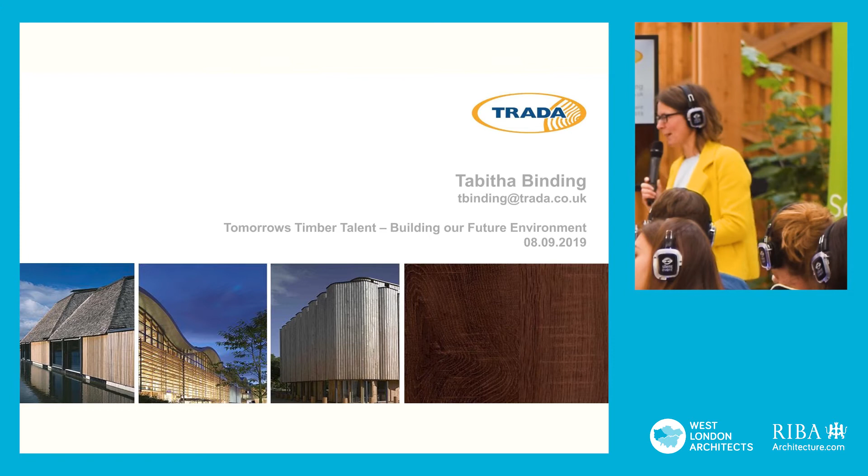So TRADA. I came to work for TRADA in January 2018. My background is in manufacturing, timber supply chains, and whole house timber building, a bit of passive house. And from our previous speaker, a whole house retrofit, 1840s, beautiful cork, limecrete, very low cost of living, very healthy house. I love my house in Wales.

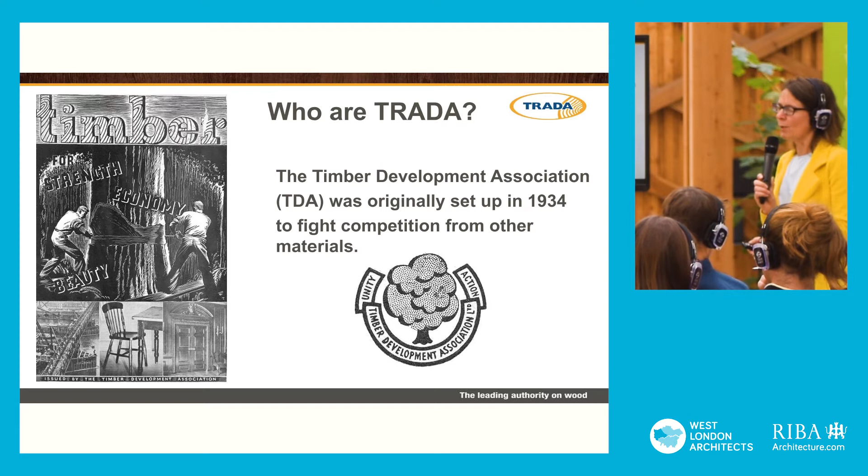So who are TRADA? Started in 1934 as the Timber Development Association, and it was to fight competition from other materials back in 1934. Now, I'd say we've got to work with other materials. All our buildings are multi-material and they are hybrid, and we really, really, really do need to work together.

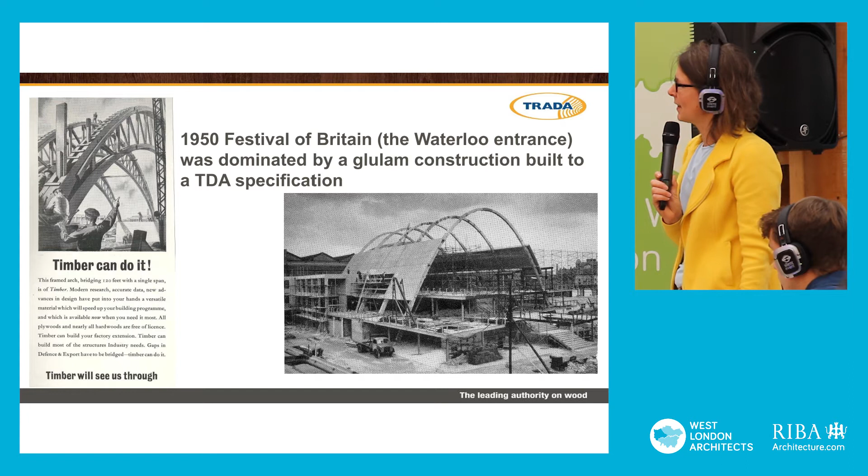So this beautiful building here, nice glulam, 1950s. It's not a new product. That was a Festival of Britain building. Obviously not still there, but we do need buildings to last and look brilliant.

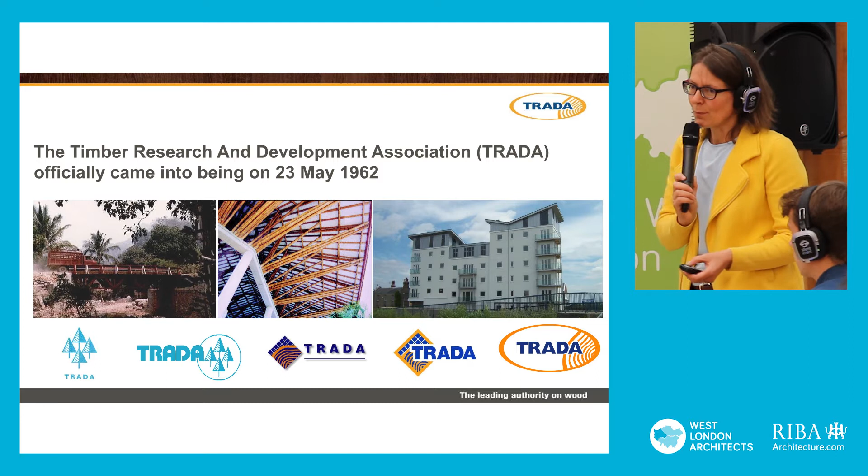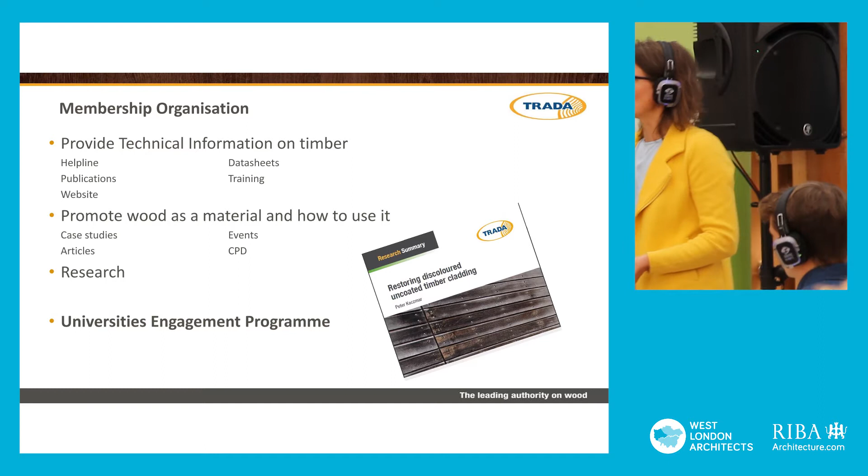The Timber Research and Development Association, as we now know it, came into being in 1962. It is a membership organisation. We provide technical information, we promote wood as a material, and we have a university engagement programme.

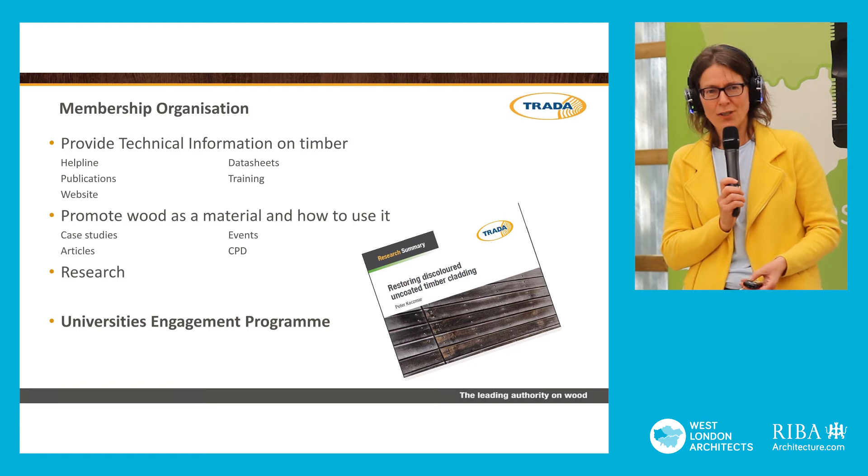Now, when I say it's a membership organisation, we also have an advisory line. So if, as architects, or any kind of practitioner, you have a query about timber, please get in touch. Phone us up and ask us, because we will give you a certain amount of free information. We won't go into details. We do have a paid-for service as well. But we'd much rather you speak to us and get some solid information than go out and learn on the job. So just bear it in mind.

Membership, again, starts about £190. It's not hugely expensive.

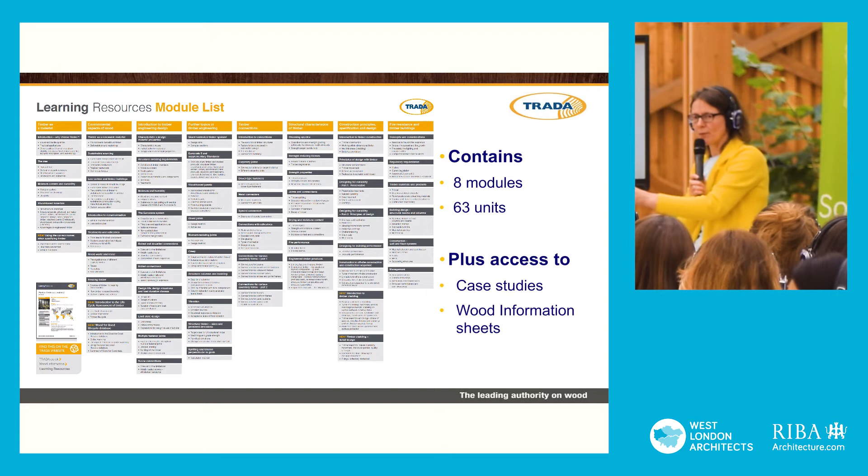So we have, I'll go more into this, learning resources. We have 100 case studies, actually more than 100 case studies, and we had wood information sheets. So our learning resources, which is absolutely free to everybody, as a registered user, you can get hold of this. 8 modules, 63 units, pretty much everything you want to know about timber. Very responsive.

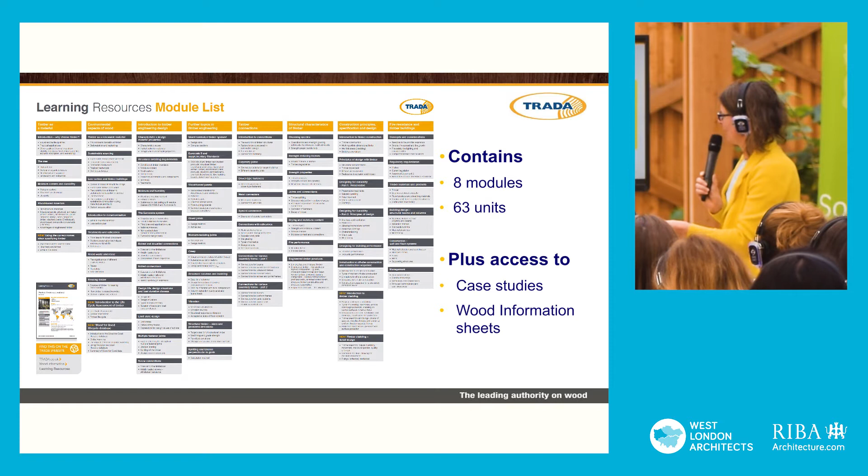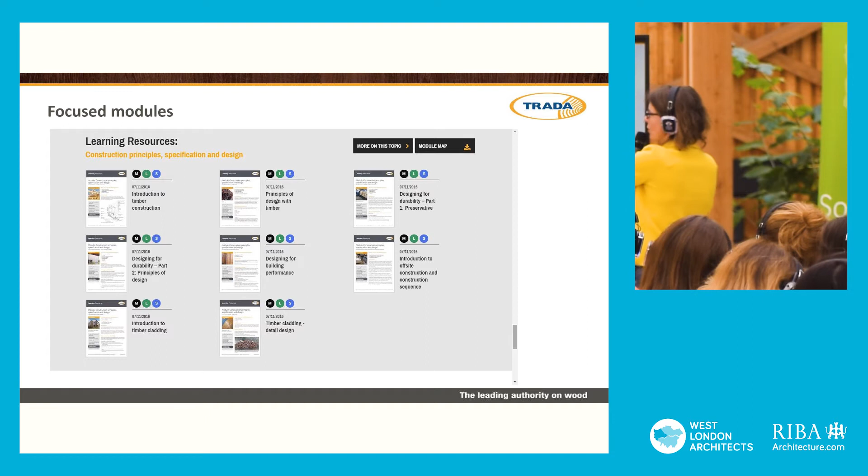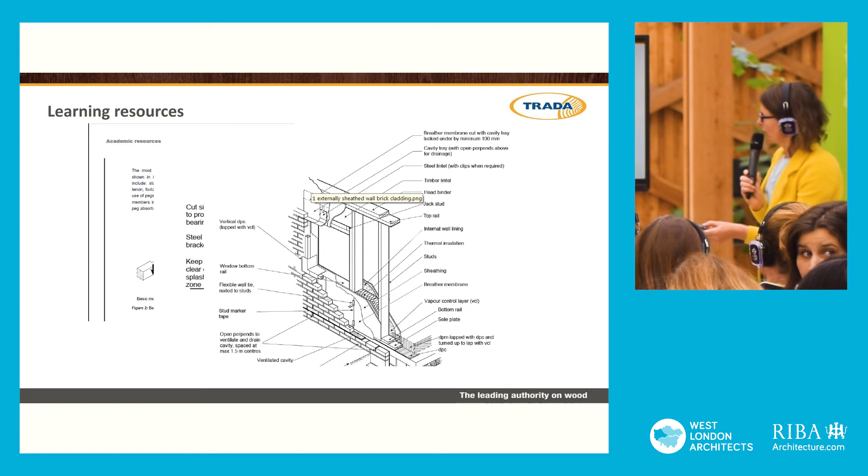So that was it. So the focus modules. So here on construction principles, specification and design, designing for building performance, introduction to off-site construction and construction sequencing. Again, if you don't know, really useful. What everything is, where it goes. And a wood species database.

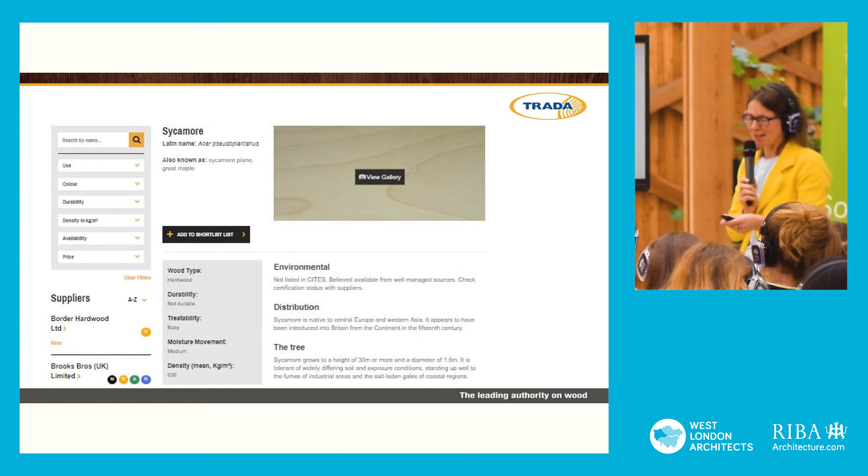If you don't know anything about a certain wood species, go on there, look it up. I must admit, I put this one on sycamore. Sycamore is my absolutely most favourite timber. It's non-durable, I'd say don't use it outside, but I've been lucky enough to retrofit a house and have a table designed and made from Welsh sycamore, and it is absolutely beautiful. I call it my antique of the future.

But I came into TRADA to work on university engagement. So I go out to pretty much every university in the country, if they're interested, and talk to them about timber. When I came in, sort of six weeks into the job, I inherited a multidisciplinary competition. When I say I inherited it, it was the first year of it. So this was February 2018.

When we brought together 30 universities, 60 students, divided them into 10 teams of architects, architectural technologists, engineers, landscape architects, and quantity surveyors, all in their last year of undergraduate study. So they could not only work with timber, but actually work holistically with timber.

Because timber, although an absolutely beautiful material, does need to be thought at the beginning. It is not best used when you shoehorn it in at the end of a program. So please, when you're thinking about timber, actually think about designing with timber. Your walls will be different widths. You will need to think about your sole plates, your ground levels. And I'm sure a lot of you as architects will be tempted to put flat roofs on.

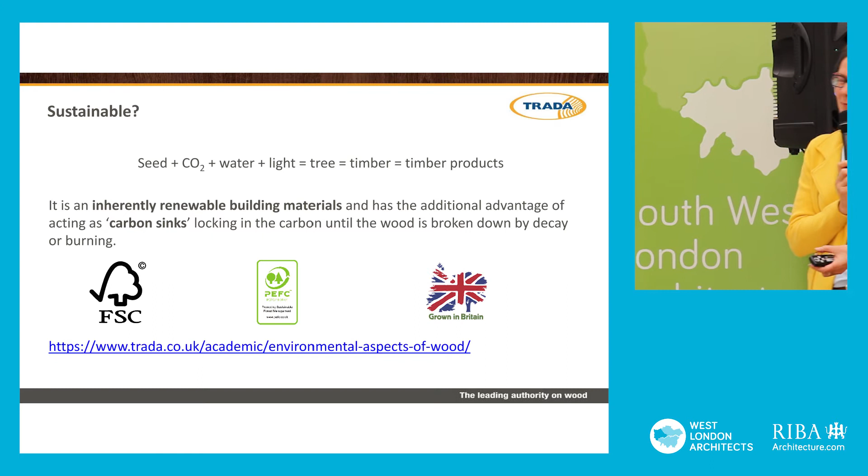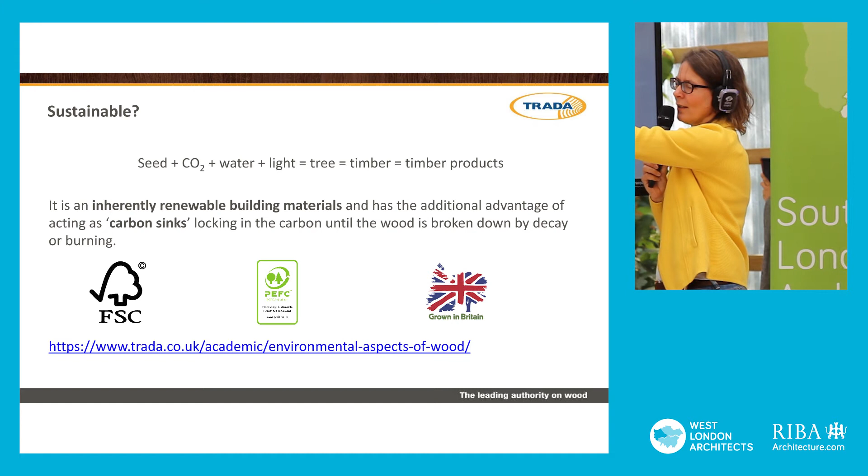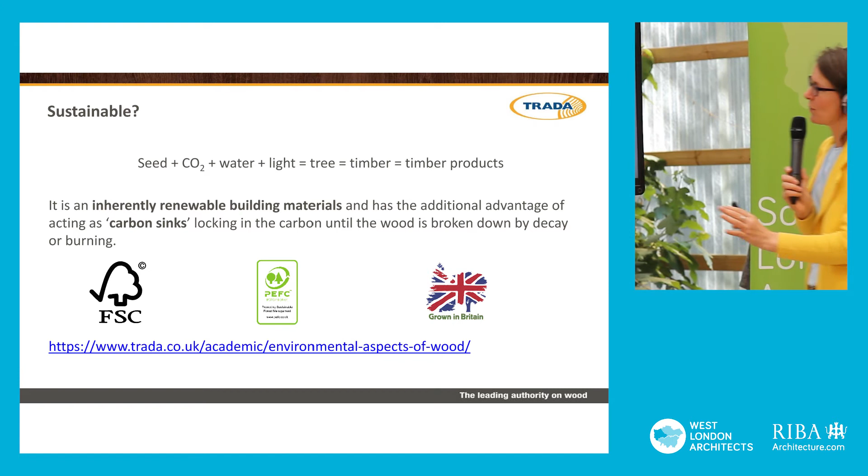So this is more about why I was here as well - is timber sustainable? From a seed, we add carbon dioxide, water, and light. From that we get a tree, from the tree we get timber, and from that we get timber products. That's all we need, nothing else. You can go on into the management, but it's an inherently renewable building material, and it also locks up carbon until the wood is broken down at its end of life, either by decay or burning.

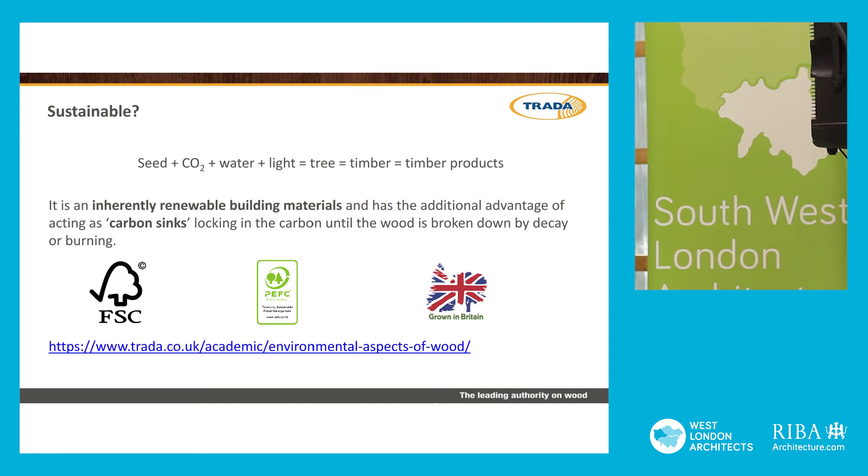You're going to have timber as a rain screen that will naturally decay, but there it is a rain screen. It should be easy to take down, easy to take off, and then be repurposed.

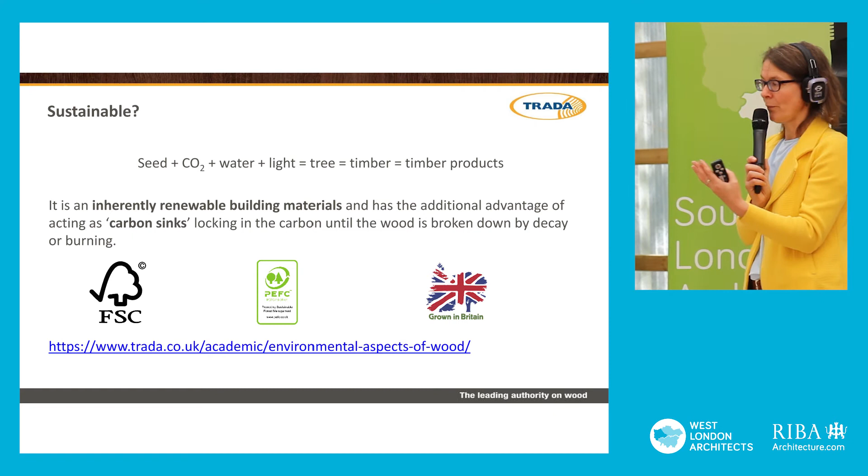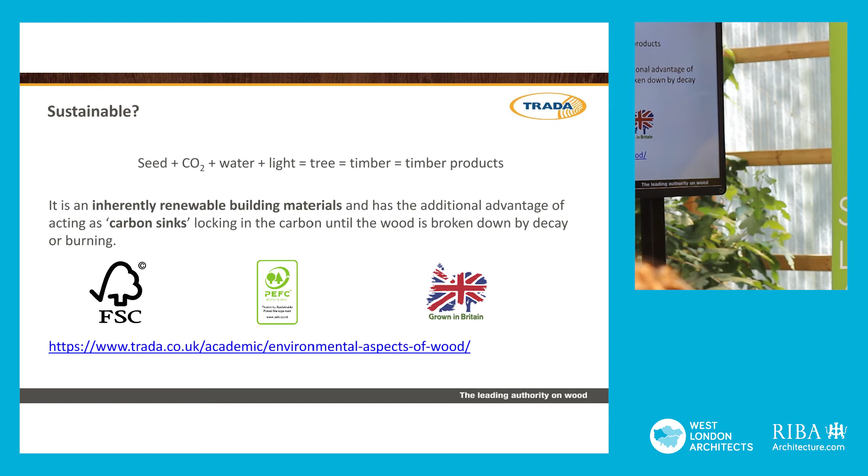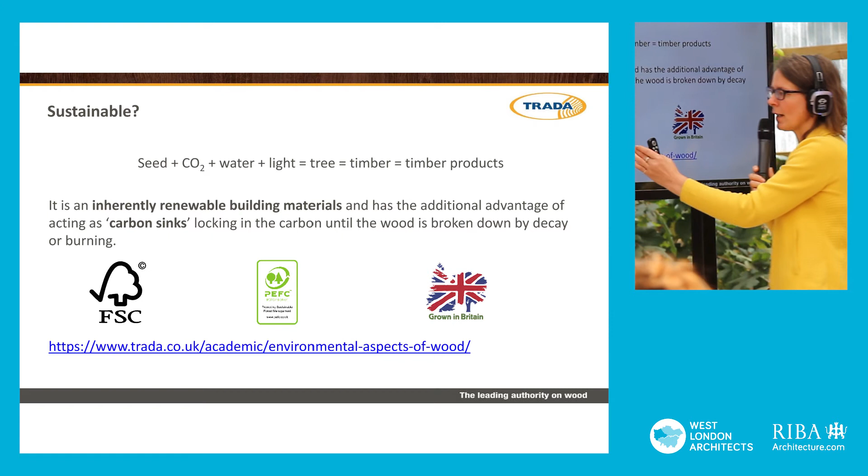Talking about sustainability, no trees in general can be cut down for commercial purposes unless you have a felling license, and in most countries, when you get the felling license, you agree to replant that timber. In Sweden, which I came home from yesterday, they have to plant 4 trees for every one they fell. You also then have chain of custody - the Forest Stewardship Council, PEFC, the Programme for Endorsement of Forest Certification, and in the UK, Grown in Britain. All of these are looking at the management, giving you certainty that your timber is coming from a sustainable source. There's all the links in here.

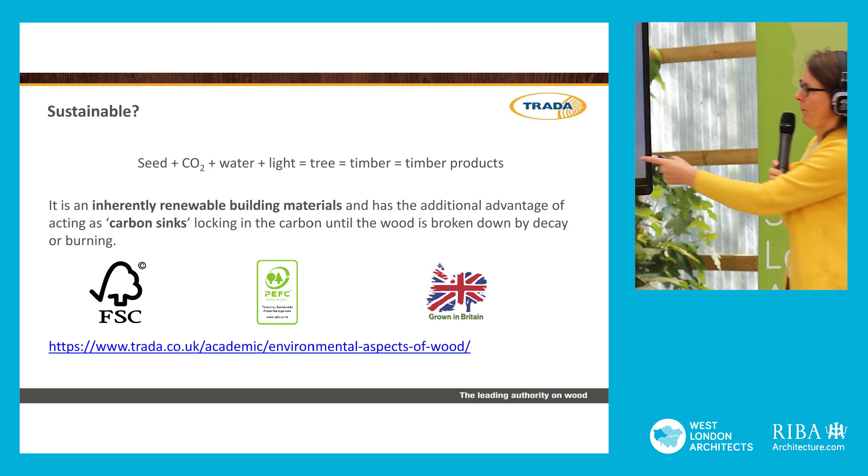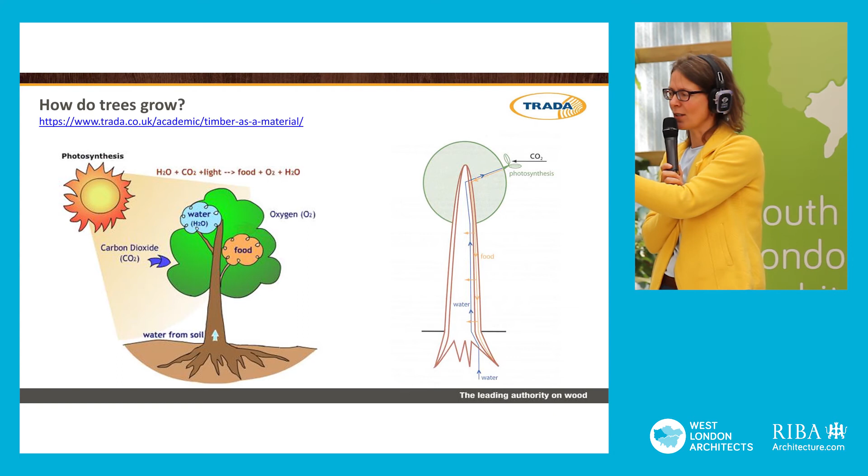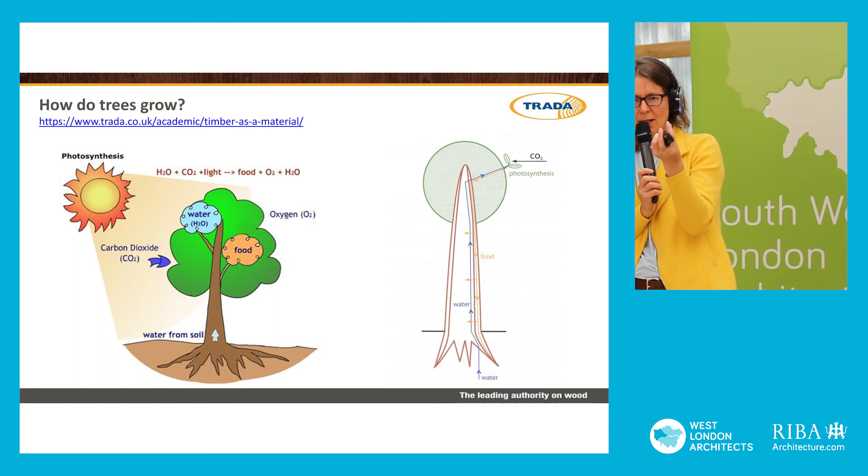So again, how does your tree grow? Something I didn't know, despite almost 15 years in the industry, it was only at about age 35 that I actually realised how a tree grew. If you imagine a traffic cone, that's your first year's growth. Add a second traffic cone on top, that's your second year's growth. Every year a tree grows, basically, an inverted V-shape over the top of it. That's why the pith is the centre, and the first year's growth is right next to that, and it keeps going out. Branches are the knots in timber.

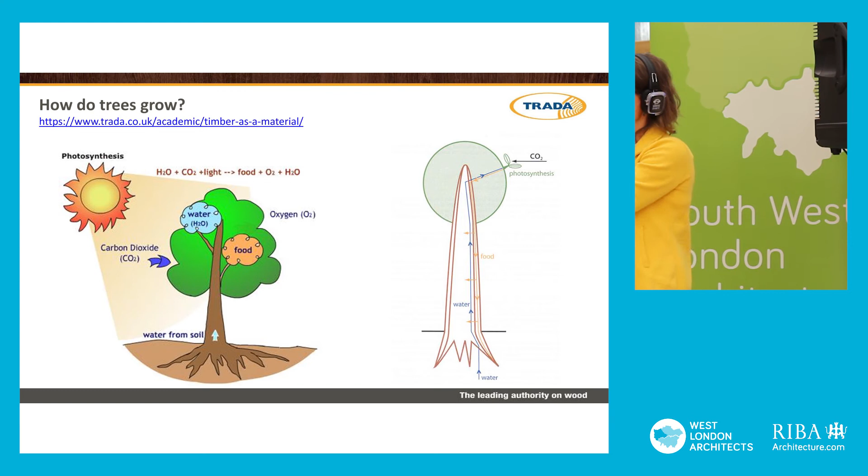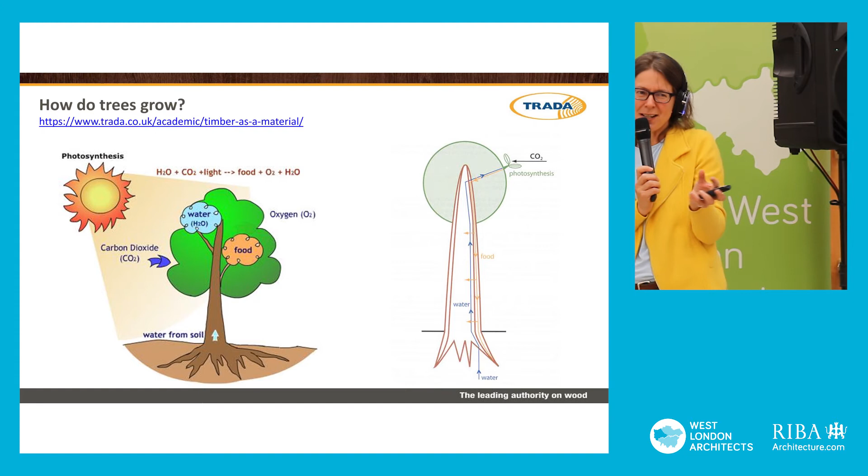So when you look in the knots, a branch always comes from the pith. This is about management - if you're really interested I could bore you probably for a whole day on timber management. That's how you know how strong your timber is, and whether you want a characterful timber with lots of nice knots and bark inclusion - things I think are beautiful, but a structural engineer would hate. He would like a square tree with growth rings probably every millimetre apart, and his job is then done. But it's a natural growing organism, which makes a fabulous material.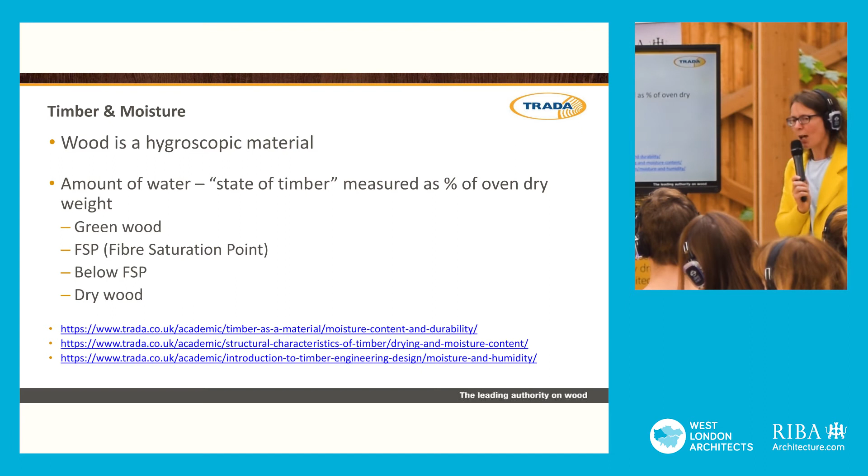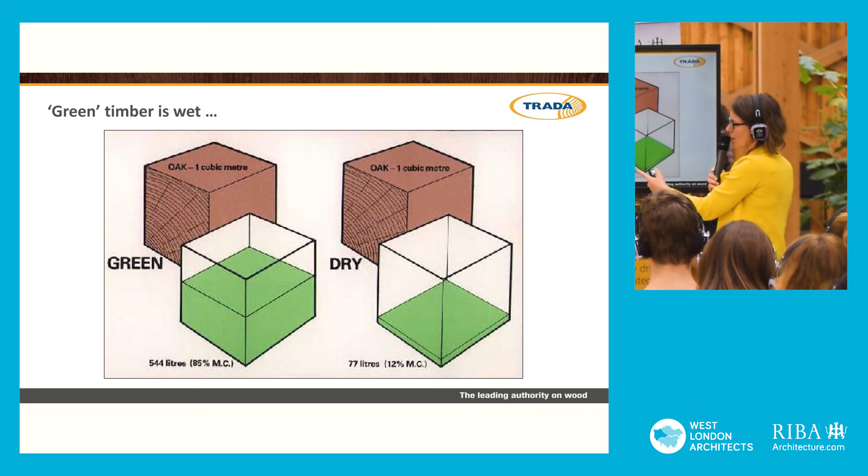I keep saying, giving you things - tell me if I'm going too close to time. Wood is a hygroscopic material, it absorbs and desorbs water. Be very, very careful of moisture. Green timber is wet, so in that cubic metre, when it is green, much of it is actually water. As it dries out and comes down to 12% moisture content, a smaller amount left is water.

I think I've got a quick quiz for you. 50% moisture content - if you can read it, what does it mean? I've got A, B, C, and D. I'm going to get you all to put your hands up. So 50% moisture content - does it mean half of the weight of the piece is water, which is A? B, a third of the weight is water? C, two-thirds of the weight is water? Or D, a quarter of the weight is water? 50% moisture content - any takers for A?

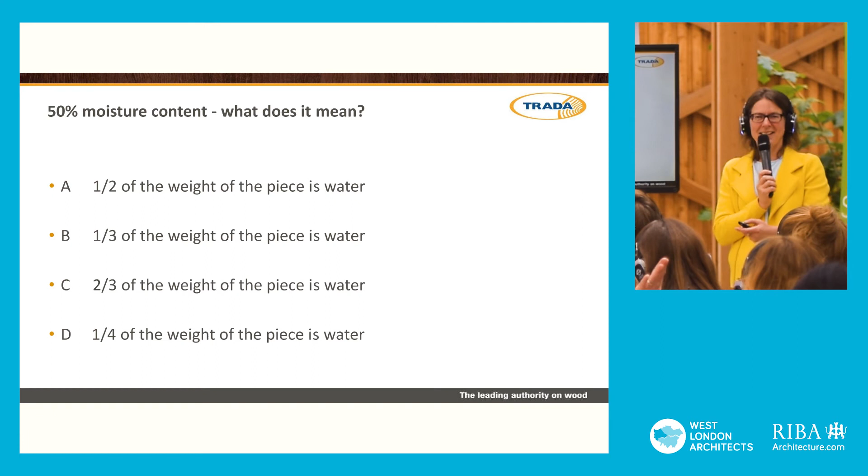Any takers for B? Any takers for C? A few more. And D? Well, all those of you who put your hand up for a third are correct.

Moisture content is based on the oven dry weight. So you have a kilogram of timber as a dry weight, with no moisture whatsoever. At 50% moisture, it will weigh 1.5 kilograms, so a third of that piece will then be water. Just so you understand what moisture content means.

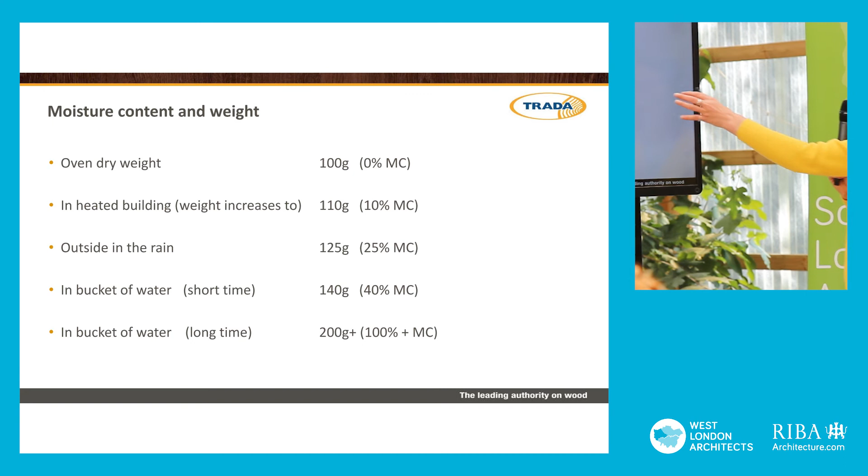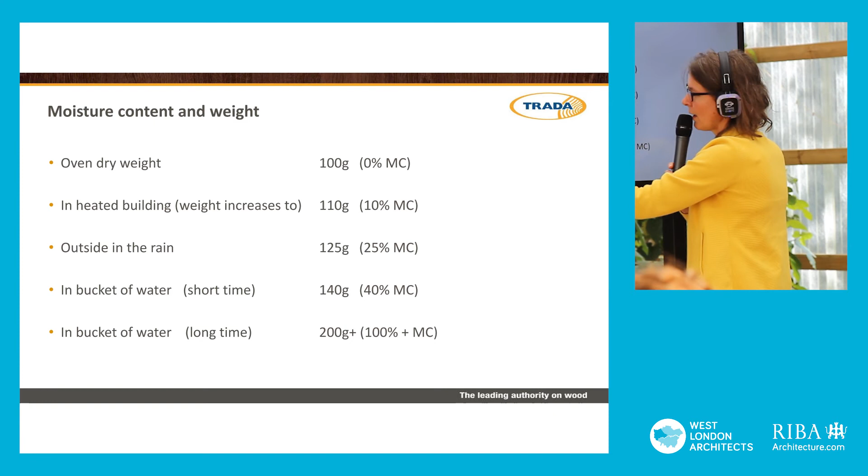Why is it so important? So we've got oven dry weight. In a heated building, it'll be about 10% moisture content. Outside in the rain, 25%. Put it in a bucket of water, it'll go up to 40%. If you leave it for a really long time, it can go above 100% moisture content - it can absorb its own weight in water.

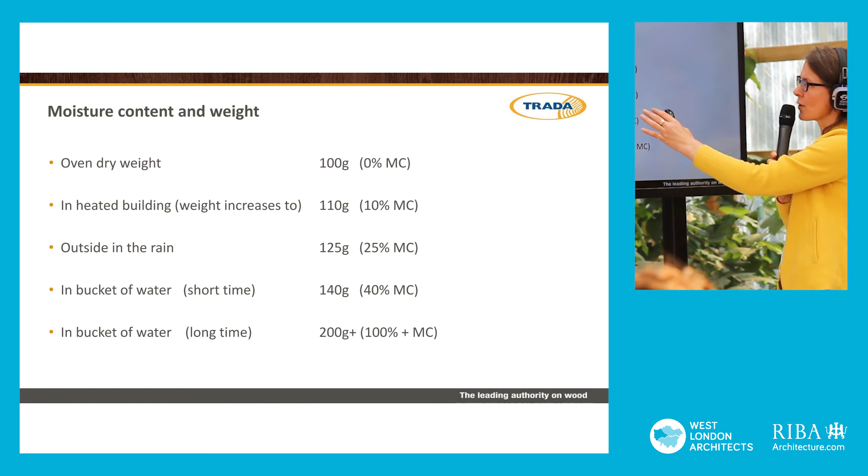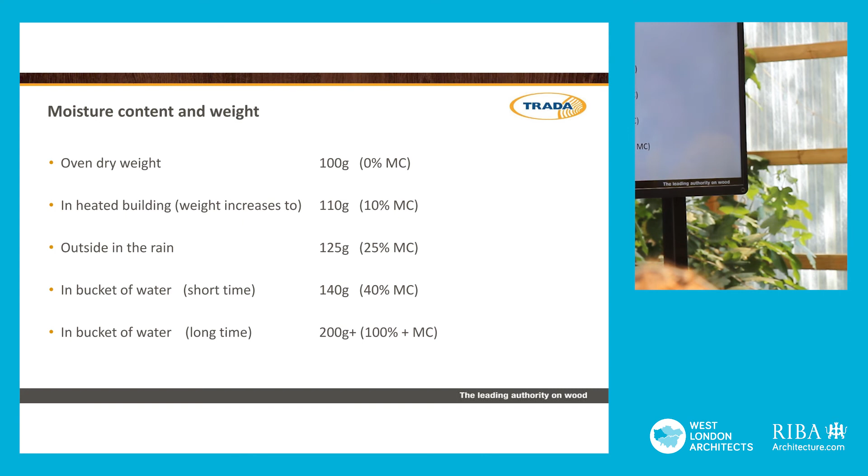This is really important because 20% moisture content is the decay threshold. You want to keep your timber below 20% to preserve it and use it for a long time. So, 20 to 22% moisture decay threshold, in-service moisture content. If you can get hold of this...

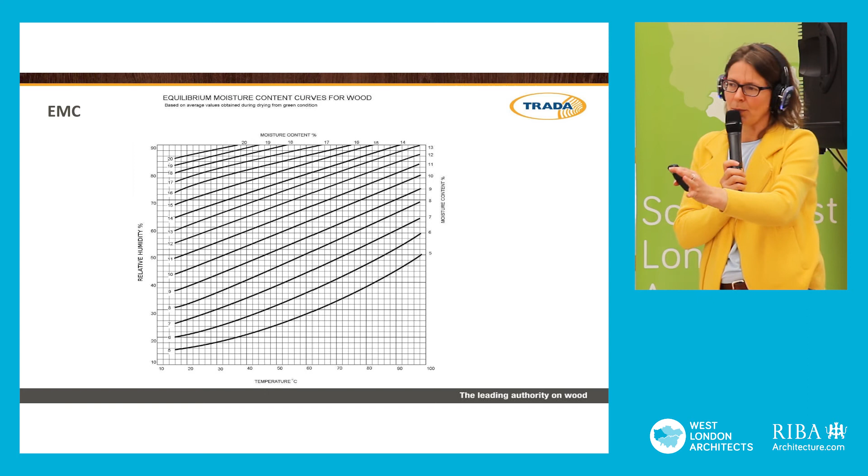Graph, and I'm more than happy to provide it, and I'm sure these slides are going out - this is your equilibrium moisture content. I think I've just broken the... maybe not broken it, just taken out the battery. That's fine, I'll just put it back.

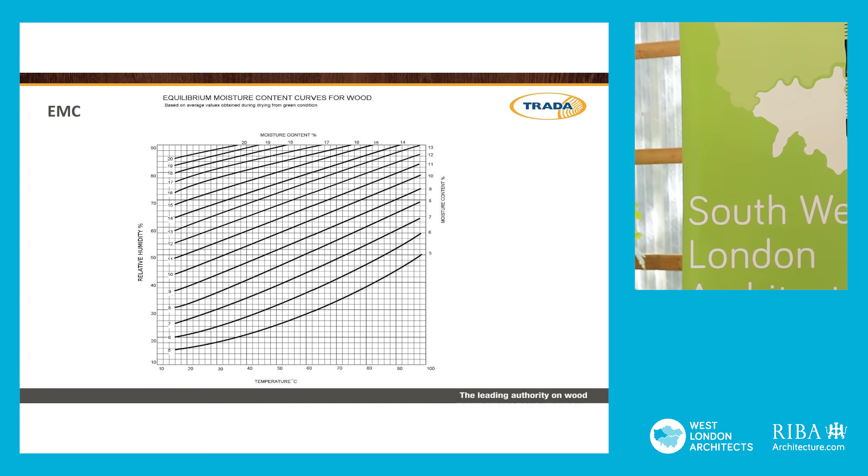As I said, timber absorbs and desorbs moisture. You need to know about three things. The temperature of your internal buildings will normally be between 20 to 25 degrees. Your relative humidity for a healthy building will be between 40 and 60%. And your timber will naturally equilibrate to the moisture content.

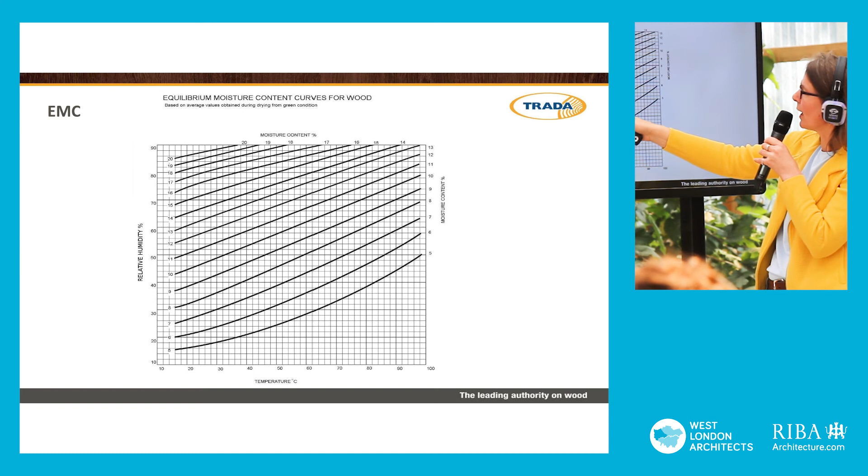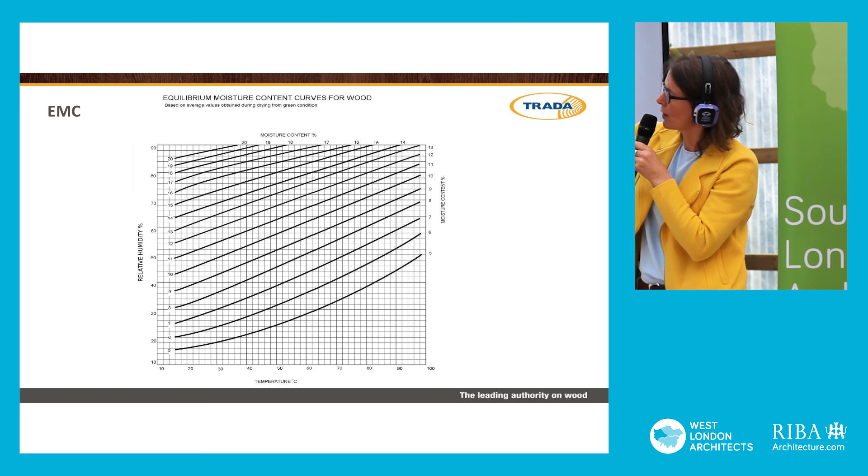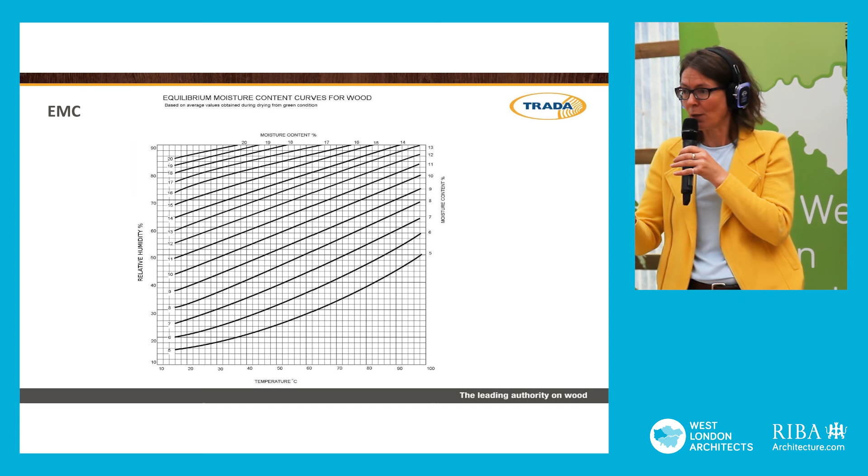So between 40 and 60% humidity, around 20 degrees temperature, you're going to be looking at specifying your timber moisture content between 10 and 12%. Your timber will arrive from your builder's merchant, if it is not a board product, at around 18%. It will dry out in your buildings, and that's why it shrinks, that's why you have gaps. Let's see if I'm going the right way now.

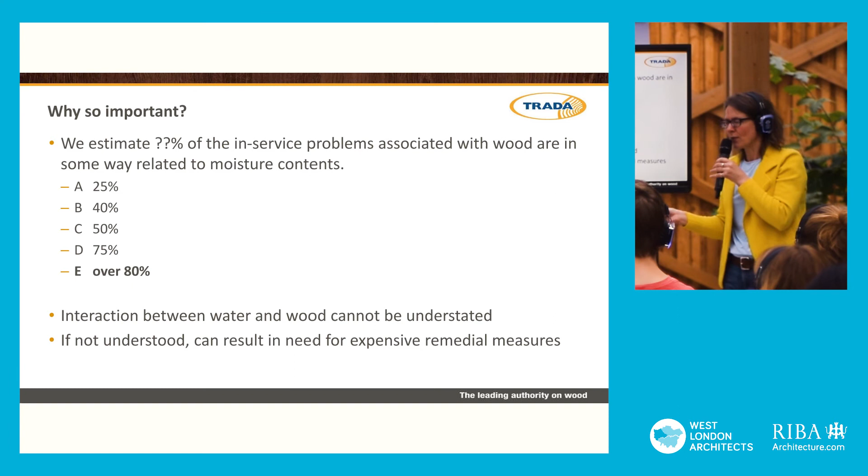And why do I say it's so important? At TRADA, we have technical consultants, and over 80% of the problems we see are moisture related, including flat roofs.

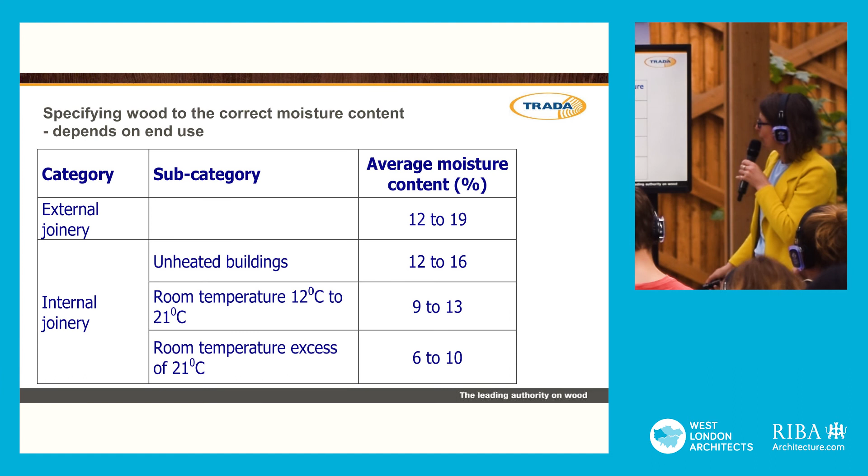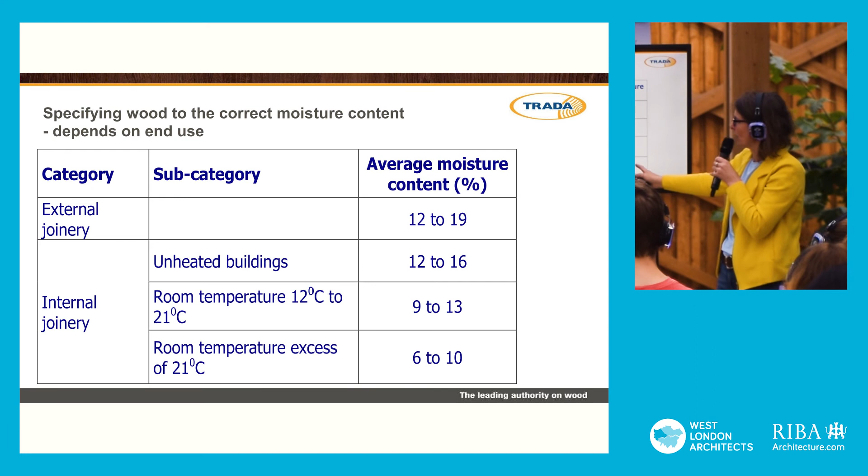Specifying - as architects you'll know this - external joinery, internal joinery in an unheated building, 12 to 16% average moisture content, 9 to 13% internally. Where you're using passive house or very dry buildings, hospitals especially, timber will go down to 6 to 10%. You can buy super dry timber, and board products will often come in at a low moisture content. CLT, cross-laminated timber, probably coming in around 14 to 15%.

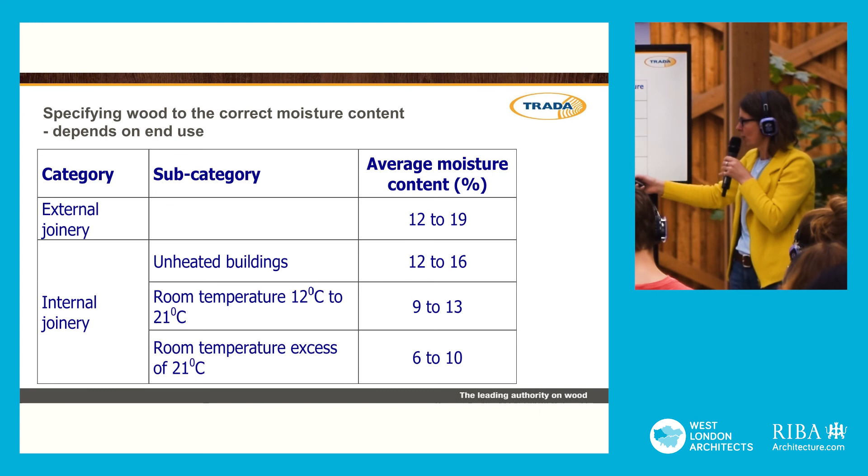And a quick final plug, case studies. If you're interested in lots of timber buildings, we have about 110. Again, mostly free to access.

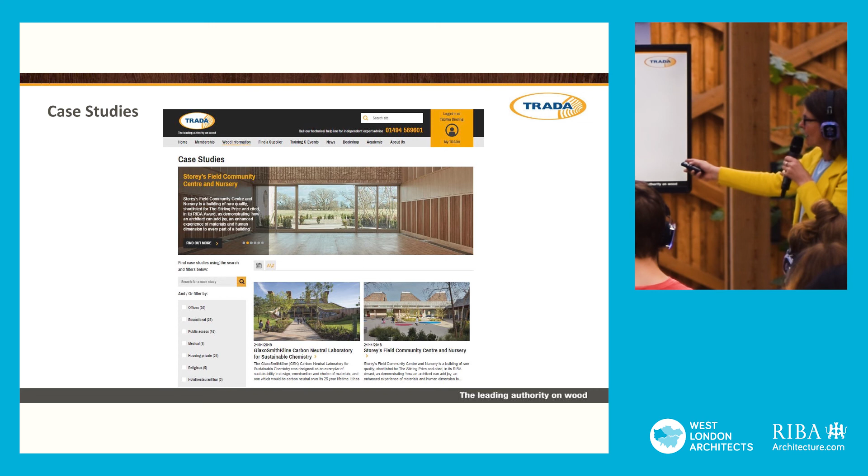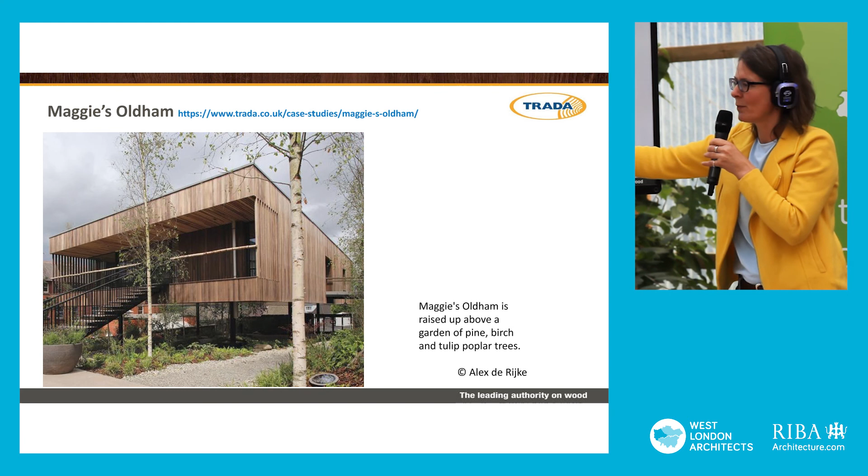This is one of my very favourites. I think Patrick, he'll be here from DRMM later. This is Maggie's Oldham. If you ever get the chance to go and see it, it is a Cancer Centre. It is beautiful.

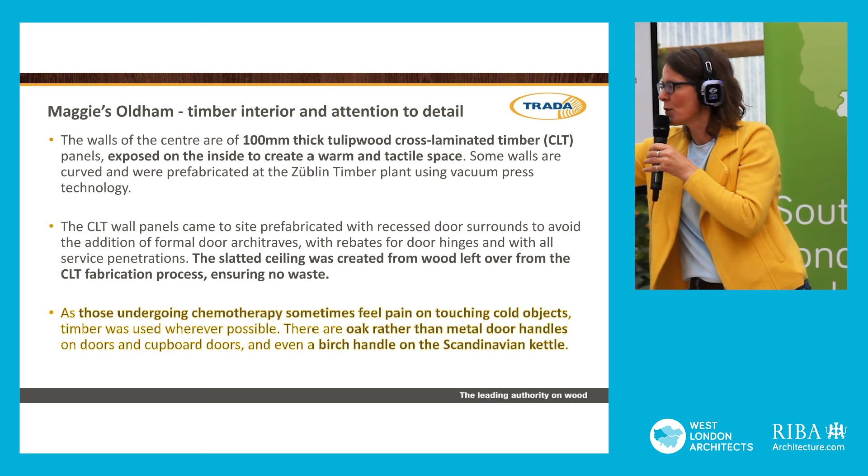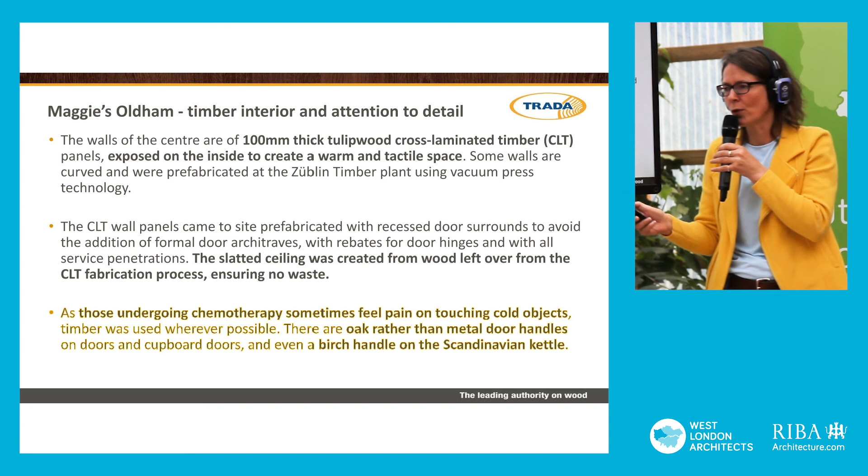And this is what almost made me weep. Those undergoing chemotherapy sometimes feel pain on touching cold objects, so timber was used wherever possible. There are oak rather than metal door handles on doors and cupboard doors, and even a birch handle on the Scandinavian kettle. Again, thinking about what your client wants and using the appropriate material to give them that.

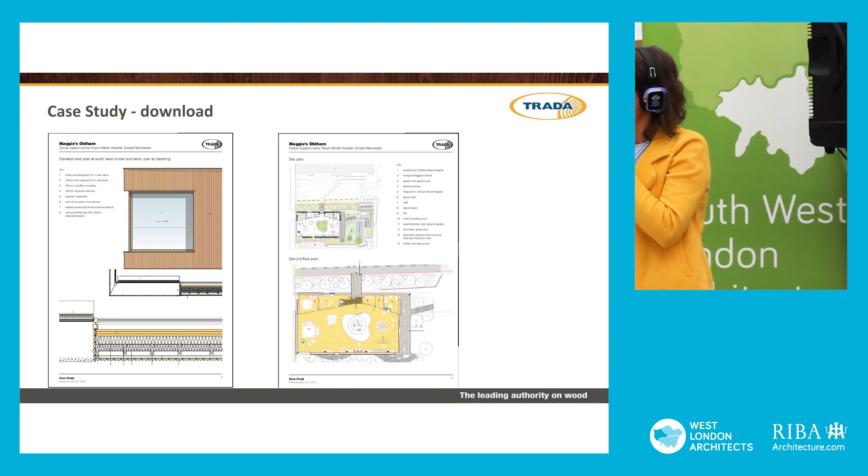Case studies - they are online. Download them, you'll get so much more information about how people did things, and did things well. Gloucester Services, M5, again beautiful. If you ever get the chance, this is not your traditional service area - there's one on the north side, one on the south side, and they are both different.

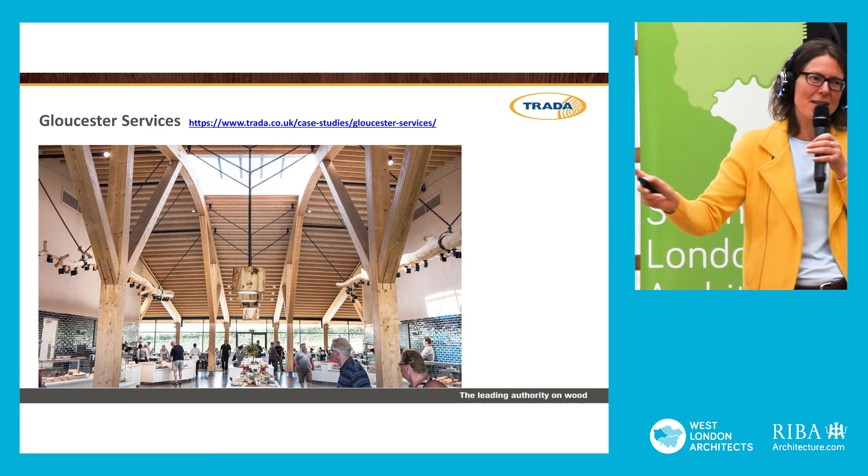I think this is going off, isn't it? This is telling me that I'm getting to time.

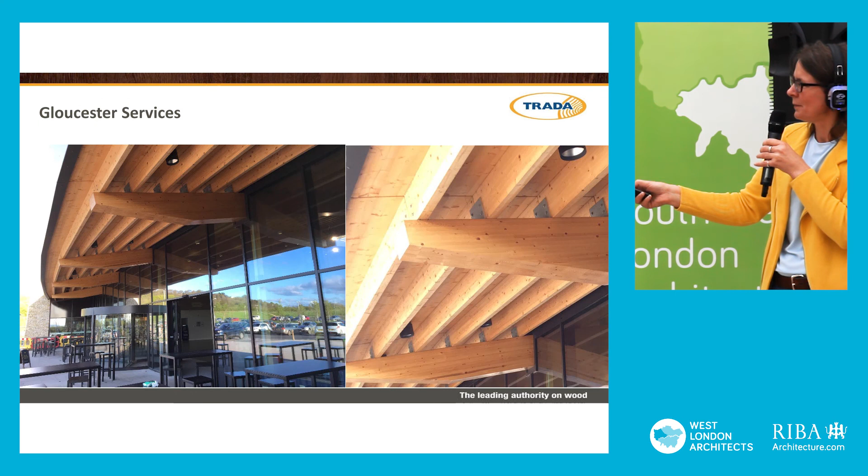With students, if you are lecturers and you want to work with students, I want them to get more hands-on. I don't think you can understand about material by just getting it out of books. We work with Studio in the Woods - I'm sure some of you will know Piers Taylor. He and Kate Darby set this up about 15 years ago. 60-odd students come together with practitioners in a woodland, probably in June or July, and spend 3 to 4 days there making, designing, handling - hands-on. I just got back from Sweden.

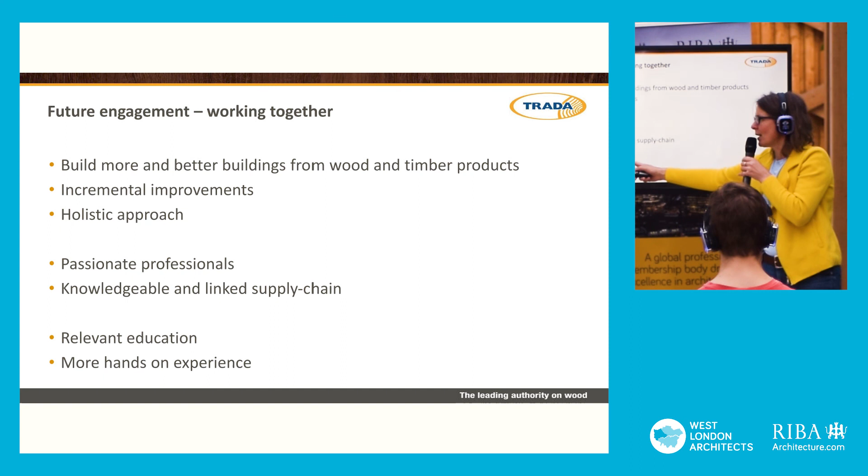I think we need to build more and better buildings from wood and timber products. I think we should ban the word innovation - I hate innovation. Let's go with incremental improvements, learn from our mistakes, have a holistic approach, have passionate professionals, be knowledgeable, and have a linked-in supply chain. We definitely need more relevant education and more hands-on experience.